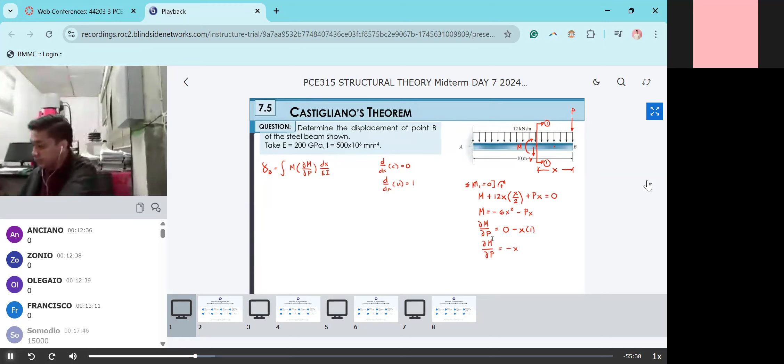Ayan, so proceed tayo. Sorry for that. So, equation ni moment na walay p. Hindi to yung isa-substitute natin ha. So, ang gagawin natin class in finding our m is tatanggalin lang natin si p. Ibig sabihin, let our load p as 0. Pag m na equation, dapat walay p na variable. So let p equals 0 lang. So magiging m equals negative 6x squared minus 0x. Ma-cancel out lang. So m is equivalent to negative 6x squared. Meron na tayong partial derivative of m with respect to p and m na equation.

So, next step, substitute po natin siya sa ating formula. The deflection at point B is equivalent to from 0 to L, that is 0 to 10. Tapos ang m natin, negative 6x squared. Tapos, partial derivative of m with respect to p is negative x, dx over EI. So, rewriting before integrating, ilabas lang po natin si 1 over EI. Then, simplify natin. 0 to 10, 6x cubed. Positive na siya, negative times negative is positive. 6x cubed dx. Pwede na yan siyang i-calculator.

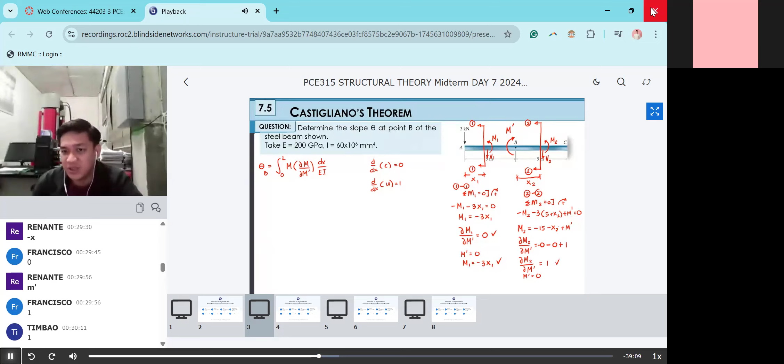Next is, let us assume na yung m prime natin is 0. Substitute natin dito. So, therefore, m2 is equivalent to negative 15 minus x sub 2. Tanggalon lang nimo sa m prime. m1, partial of m1 with respect to m prime. m2, partial derivative of m2 with respect to m prime. Okay, substitute na natin dito sa ating equation. D over dx of any variable raised to 1 is 1.

Okay, so the angle of deflection at point B is equivalent to, si M1. So from 0 to 5, M1 po natin is negative 3x sub 1. Indication lang ng sub 1. Sir, dili siya negative 3x sub 2? Opo. That's correct. Thank you for that correction. Negative 3 times 5 is 15. Negative 3 times x2 is negative 3x sub 2. Naa siya 3 sa unahan. Yan, that's correct.

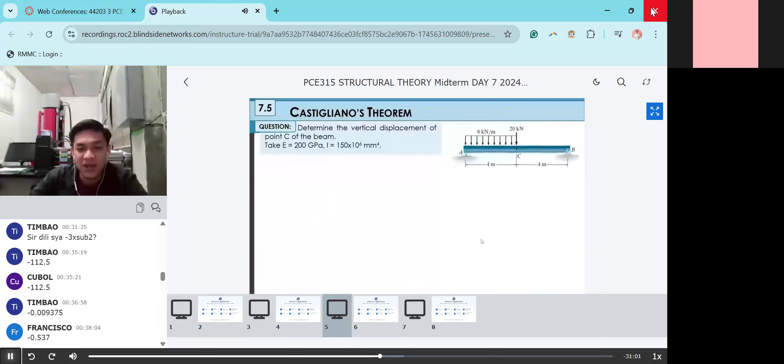Negative 0.537 degrees. That is our answer kapag naka-degrees. Okay? Diba? So, parehas lang din siya sa virtual method. Medyo dili lang kayo siya hassle kay once lang ka mag-cut. Okay? So, before we end our class, we will have our last example for this topic. So, last example na and we will dismiss na.

So, determine the vertical displacement of point C. Ayan yung hanapan natin, si point C. Deflection or displacement ang ginapangita. So, may E tsaka I tayo na binigay. Simply supported. Nasa tunga. So, dalawang part na may loads tsaka walang loads. So, wala tayong choice. Twice tayo mag-cut. And then, ang dilemma dito, kanina, hindi tayo nagkuha ng reaction sa supports kasi hindi naman natin siya magagamit. Iniiwasan kasi natin.

Pero dito, hindi tayo makakatakas. Kaya naman siya parehas reaction sa left o right. So pag pa-left or right atong palingion, makapture gyapon atong support. So we really need to find our reactions. Kabalo man magko-reaction, statics pa lang. So, anong gagawin kapag ang hinahanap is displacement? Lalagyan natin ng load P kung saan yung hinahanapan ng displacement. So, sa point C man, load P.

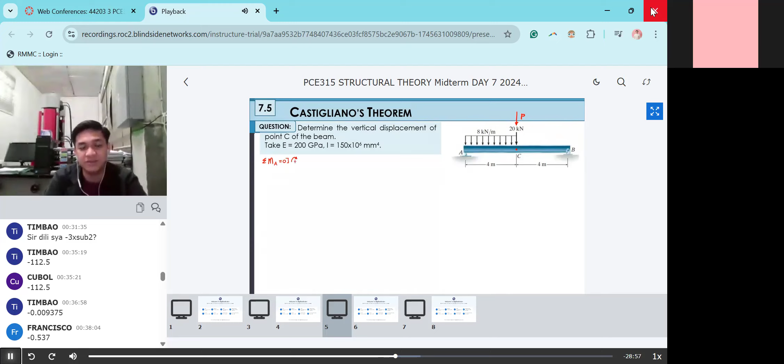Okay na? O sige, palitaan na to si RA tsaka si RB. Take note, meron tayong dinagdag na load P, so nasa variable. So, start tayo. Summation of moment at point A is equivalent to 0 where all clockwise forces are positive. So, lagyan natin pasaka si RB, then pasaka si RA. Kay A man tanang moment, so si RB is negative kasi counterclockwise. Tapos RB multiplied by 8 meters na lever arm.

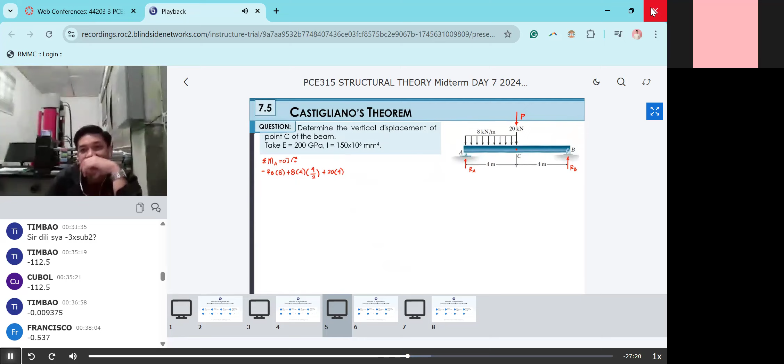Plus, itong uniformly distributed load. Gawin nating point load, so area lang na siya, 8 times 4. Then its lever arm is kalahati ng ating rectangle, that is 8 divided by 2. Ay, sorry, 4 divided by 2 lang. Length is 4. Tapos si P, si 20, kasali pa. So, plus 20 times 4. Tama na? Wait lang ha. I am thinking something. Pag may load siya nakatapat, redundant kapag plus 20 times 4 tapos plus P times 4.

Pag ganito class, special siya kasi meron siyang point load. Ang gagawin natin, si 20 kilonewton, i-convert natin into P para hindi siya redundant. Si 20 will be treated as P. So, dili siya 20 times 4, P times 4, isa lang. Pag naay matungnan nga point load kung saan hinahanapan natin ng deflection, si 20 ipisa na. Di ba kanina, first example, lagyan natin ng P, then let P equals 0. Dito is couple, let M prime is 0.

Pero dito, natungnan man ug point load, so mamaya let P is equivalent to 20. Para di siya redundant. Redundant pag P times 4 tapos 20 times 4. So, P times 4 lang siya. So, again, for the record, pag maglagay tayo ng point load na may point load na daan, i-convert lang ito nga load into P. Okay, so equivalent to 0 tayo. So, ibig sabihin, yung RB natin, yung sagot is in variable.

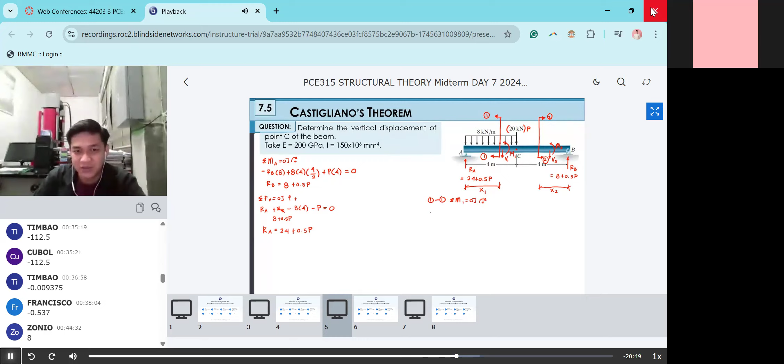Okay, let's start. We will create our moment equations. The first one is at section 1-1. Summation of moment at point 1 is equivalent to 0, where all clockwise forces are positive. So, focus on RA. RA, I'll substitute it directly. RA is 24 plus 0.5P times x sub 1.

Then, the 8 kilonewton is counterclockwise, so negative: 8 times x sub 1 times x sub 1 over 2. Then M1. M1 is negative, equals 0. So, transfer it to the other side; M1 becomes positive. Then, expand. 24 times x sub 1 is 24x sub 1, plus 0.5P x sub 1. Negative 8 divided by 2 is 4, x sub 1 squared. That's M1.

Next, let's put our guide: d over dx of a constant is 0, d over dx of any variable raised to 1 is 1. So, partial derivative of our moment with respect to P. Again, with partial, all variables except P will be treated as constant. So, 24x sub 1 is a constant, so it's 0. Next is 0.5x sub 1.

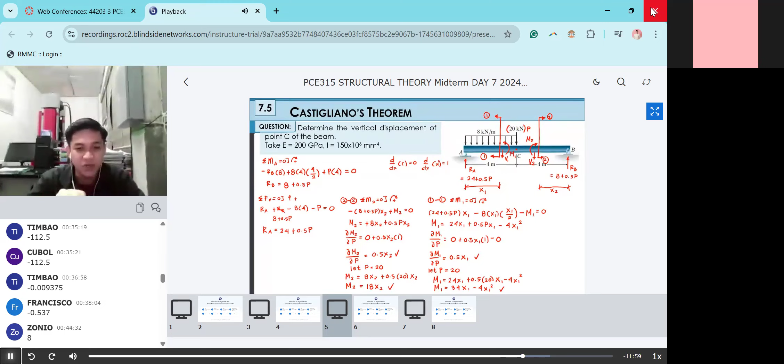Next, M2. Let P is equivalent to 20, since the actual load is 20 kilonewton. So, for M2, substitute: 8x sub 2 plus 0.5 of P, which is 20, x sub 2. So, M2 is 8 plus 10, 18 x sub 2. Check. Complete: equation M1, partial derivative of M1 with respect to P, equation M2, partial derivative of M2 with respect to P.

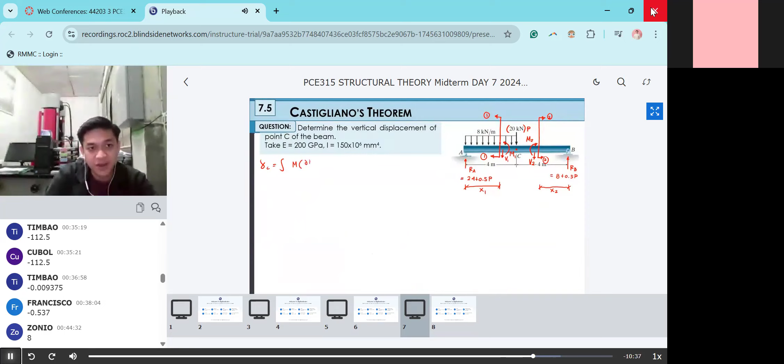So, again, we have M1, M2, partial of M1, partial of M2. The last thing we need to do is substitute into our formula. The deflection at point C is equivalent to the integration of M times partial of M with respect to P dx over EI from 0 to L. First, deflection of C: M1 is 34x sub 1 minus 4x sub 1 squared, times partial of M1, 0.5 x sub 1, dx over EI, from 0 to 4.

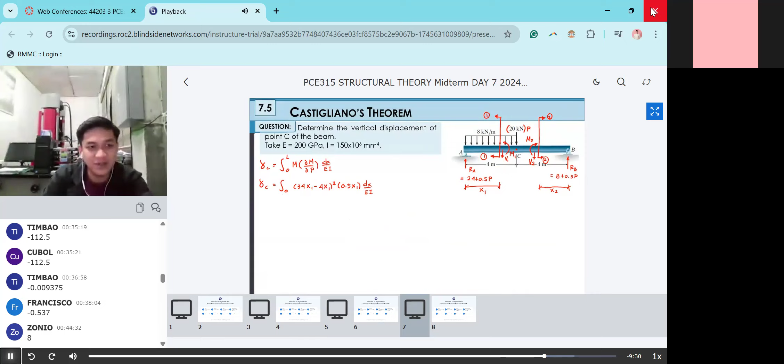Plus M2, 0 to 4 again. M2 is 18x sub 2, times partial of M sub 2, 0.5x sub 2, dx over EI. You can go straight to the calculator. Disregard the x sub 1 labels. So, over EI is in our answer. You can rewrite it.

Rewriting before integrating: 0 to 4, 34 times 0.5 is 17, 17x sub 1 squared. 4 times 0.5, negative 2 x sub 1 cubed dx. Factor out EI. Plus the other: 0 to 4, 18 times 0.5 is 9, x sub 2 squared dx, 1 over EI. Calculator: 17x squared minus 2x cubed dx 0 to 4 plus 9x squared dx 0 to 4.

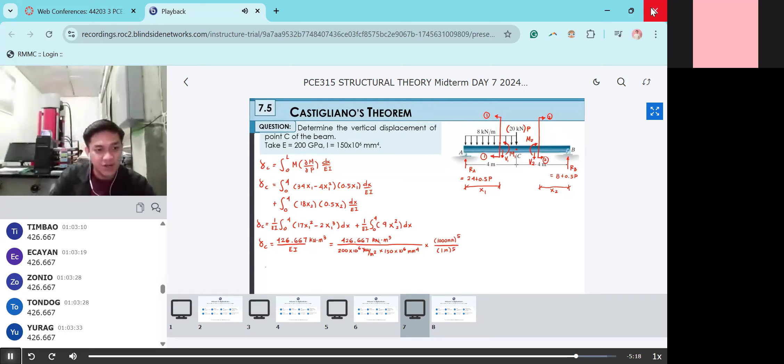E is 200 times 10 raised to 6 kilonewton per meter squared. I is 150 times 10 raised to 6 mm raised to 4. Multiply by 1,000 mm over 1 meter to convert. What is our deflection of C in millimeters? Yes, that's correct: 14.222 millimeters. Final answer.